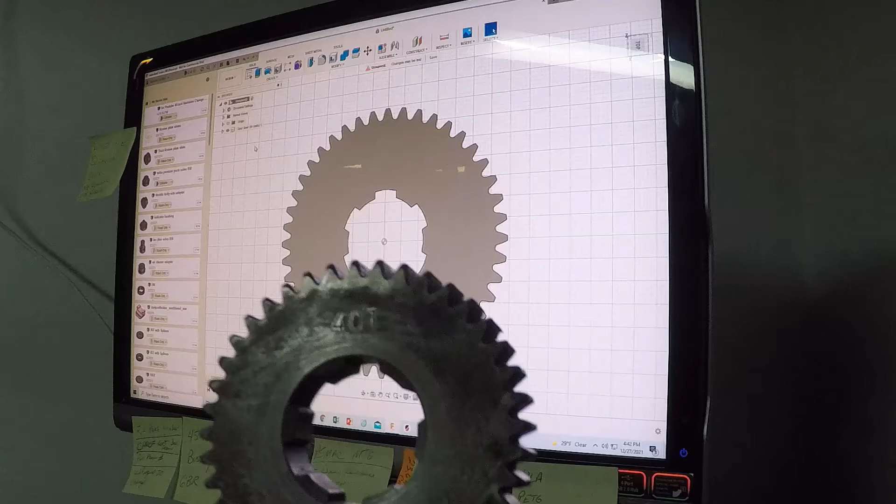I did not get a full set of them. Here, in fact, is an original factory one, and this one is a 40 tooth. You'll notice it has a quite unique feature - not a single keyway, but a spanned 6 spaces around it. This is a module 1.5 gear, and it is made of unobtainium.

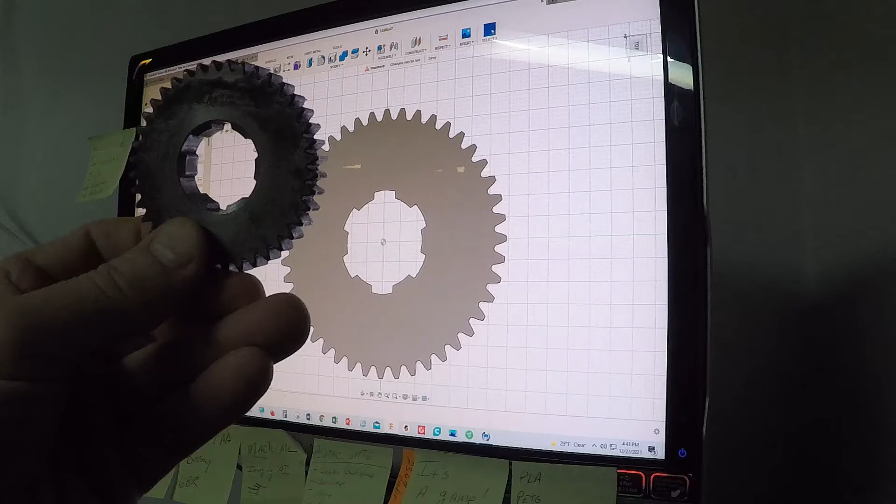You can get them, you can have them printed, but I've invested a lot of time, a lot of, well, depends who's asking, a lot of money getting to where I can 3D print my own if I need them, only for my personal consumption.

And from that one I was going to show you just kind of how I did it. Here's one on screen so you can see it. Obviously you can rotate it around and look at the tooth pattern. If you look at that, very, very uniform. The 3D printer will do a really good job of recreating this.

One issue - it essentially has to compensate a little bit for shrinkage. Now if you look inside the splines, there are different surface areas in here. I haven't saved this, but you can kind of see how this is distributed. But if you look really closely at the splines...

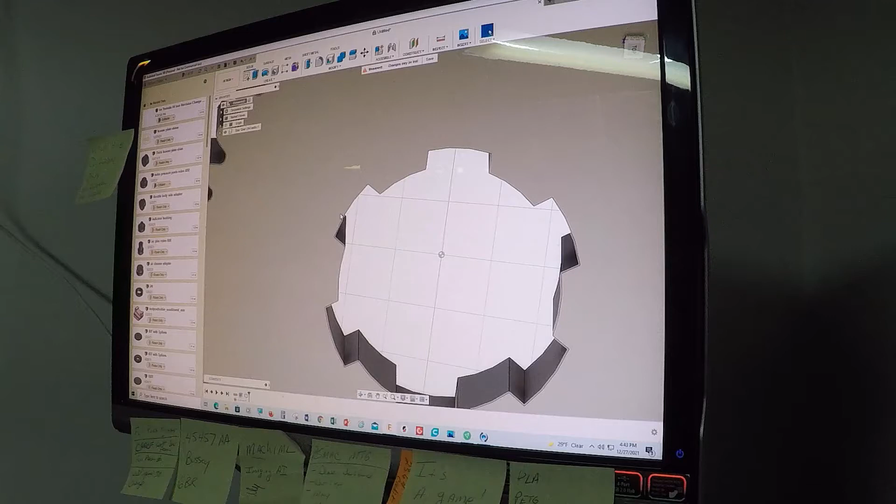It is square here, but it's square and it is riding on an outer race. And then so that leaves these right here with that pointed space.

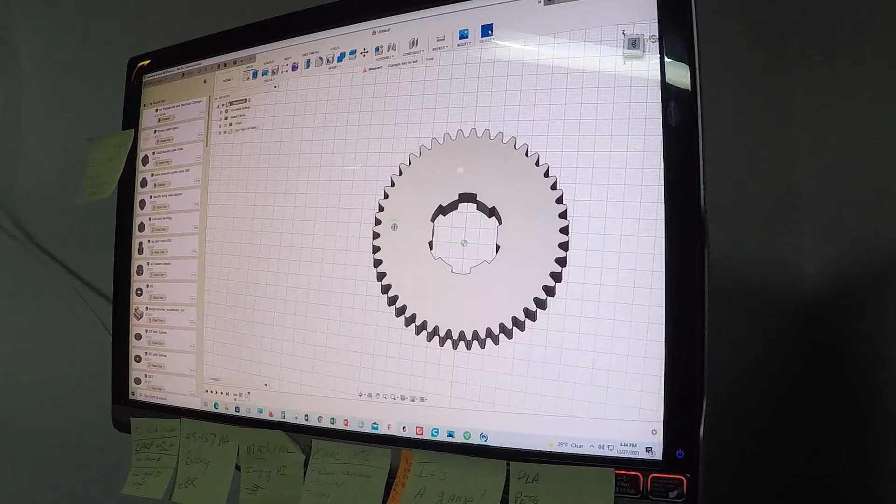Now I've made several of them. I wasn't going to show you just what I had done on one of them, but I thought, well, it took me a long time to get it. There were a lot of YouTube videos, a lot of this, a lot of that using Fusion 360. I thought I'd just show you because once it's all done, it's not too bad at all.

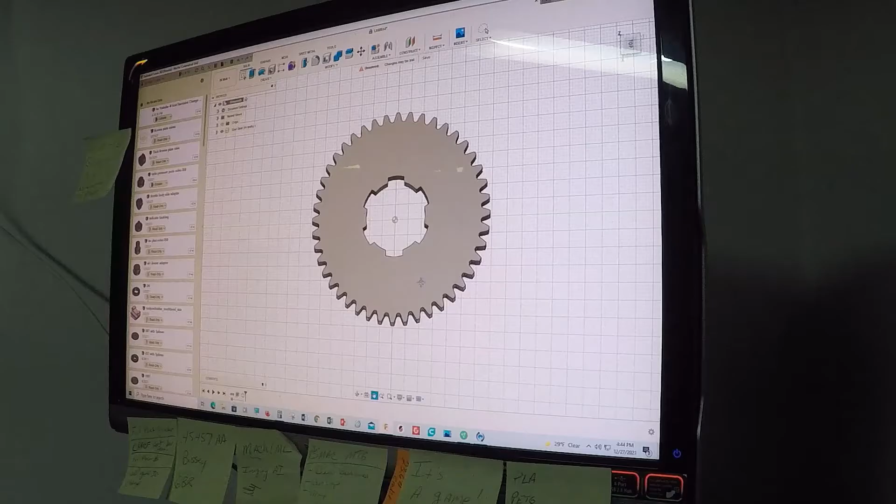Okay, brand new design, just came up here under file, new design. All right, before you go too far, go ahead and click save, give it a name. Now, this uses cloud storage on this free version, so I'll just share that with you.

Let's call this one - let's go cloud, 44 tooth Harrison gear for YouTube. Okay. Storage, I've already got a folder set up. I've already done it once just to go through the motions again, remind myself, but I'm going to save it again into the same area. Click save. Okay, so now up here you can see that there is a cloud 44 tooth Harrison, etc. So we've got a blank page.

And you can move this around. However, I'm not going to try to make you an expert in Fusion 360 because I am far from anything close, barely. Other than barely being functional, I'll go from there.

Okay, so the first thing is there is a very neat trick inside Fusion 360. If you look under the tools, you're going to see something called add-ins. This is what took so long to find. If you're trying to draw spur gears on screen, God love you, have fun, but there's a much easier way. All right, so tools, add-ins. Under that, there's scripts and add-ins. Somebody's already done a lot of work on our behalf, so let's go into here.

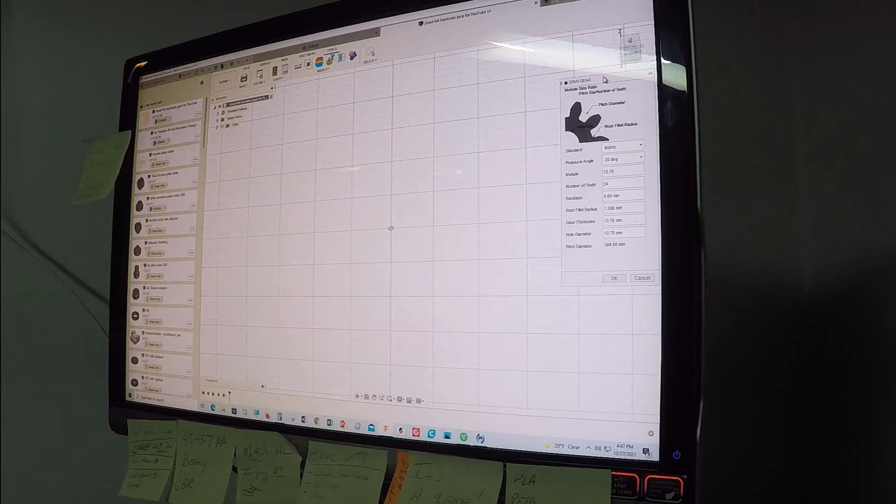And I'll put all the stuff on the screen. Hopefully you can see that right over here. I'm going to bring it over so you can see it. Now here's where the magic is.

We're making a metric gear. We could make an English gear, no problem. Pressure angle, we're going to leave it at 20 degrees. The module, we're going to go 1.5. Okay, the number of teeth, I believe we decided on 44 because it's a nice size. Don't worry about the backlash.

We're going to come back to this in a second. Gear thickness - 10 millimeters is right about where the factory gear is. So I wouldn't go much more than that. You're not going to gain a ton more strength in it.

Again, these are going to be expendable gears. You can run them, they'll be fine. Again, they're only moving the carriage. They're not doing anything dramatic as far as carrying the load of the spindle. So from that one, let's go 10 millimeters.

And then the hole diameter, I'll put these in the documents here. The hole diameter is going to be 22.97.

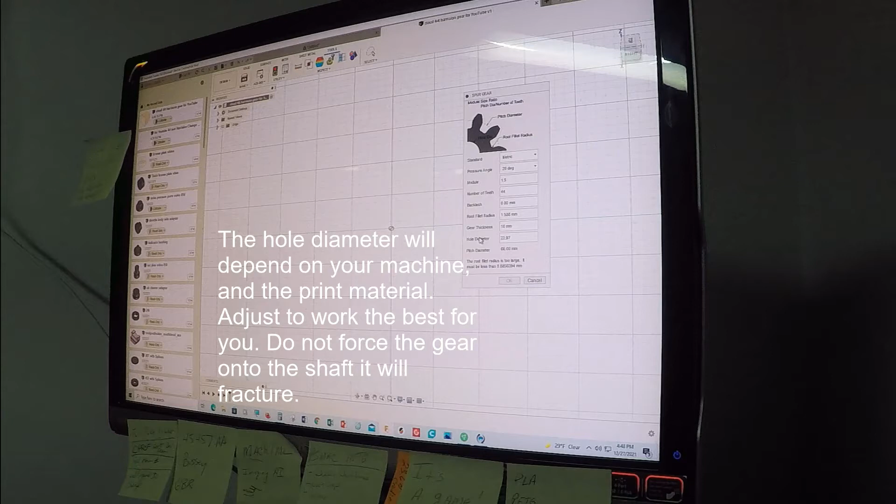The measured is 22.95, but shrinkage, when you print this stuff, it's going to draw up a little bit. Again, these are going to be really, really close, so don't worry about it. But what I'll mention now is right down here, there's an error message that says the root fillet radius is too large. It must be less than 0.885. All right, so this is the one that's causing you the issue.

Go 0.885. Okay, now pitch diameter, that's handled by the tool itself. 20 degrees, 1.5 module, 44 teeth. Not going to worry about the backlash. We're going in plastic, and the gears, when you bring them up on the banjo, it's going to be adjustable, so the backlash is something you can control. Root radius, we just adjusted that one. Gear thickness is 10 millimeters.

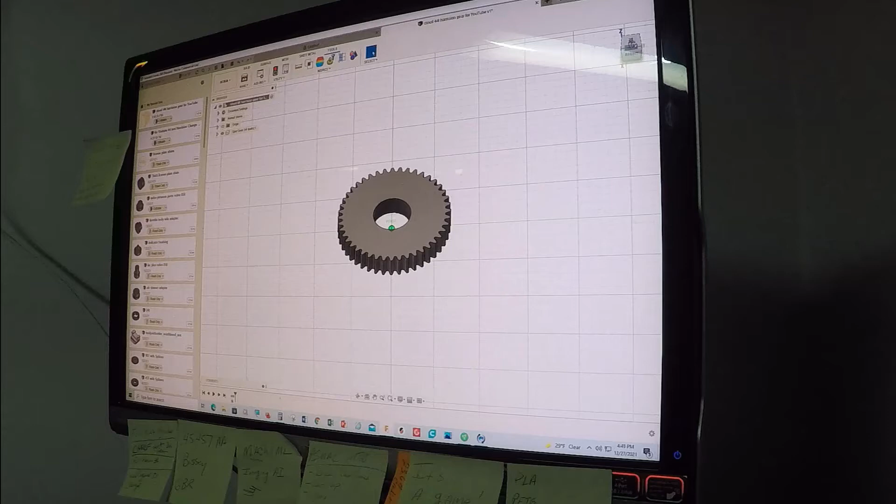Hole diameter, I bumped it up by 0.02 millimeters because of the shrinkage. I just want a nicer fit on the spline. Normally I go 22.95, and then we go. All right? Boom. Give it a second to get its breath. Boom. There's your gear. Wow. Boy, that was pretty easy. Absolutely. So there's a beautiful gear rendered for you and ready to go. The big problem now is, okay, Dan, how the heck did you do that spline?

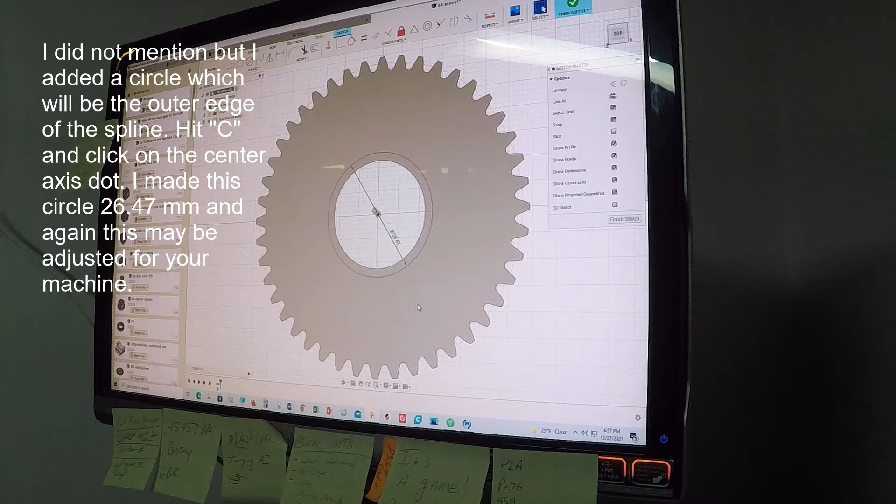Okay, so we've generated the spur gear. I'm going to clip out the previous version I was doing there. It kind of got screwy. It was carrying in attributes from our previous one, and it was causing me heartache. So, right from here, I'm going to do an L, which is going to draw a line. Don't worry about the dimensions yet. I'm going to come up and kiss this line right here, and go right across to this one. And I'm going to connect right back to the center.

Now there's easier ways to do this. There's 1,500 different ways of doing this in here. So I'm going to come right here, hit escape to get rid of that. Ooh, see, that's how it did that? All right, we'll fix it now. Hit D for dimension, and we want half of 6.45. So I'm going to go 6.47 because of that shrinkage issue, divided by 2, and 3.235. Boom. I'm going to do the same thing on the opposite side. 3.235. Boom. Hit escape, just break out that tool, and there you go.

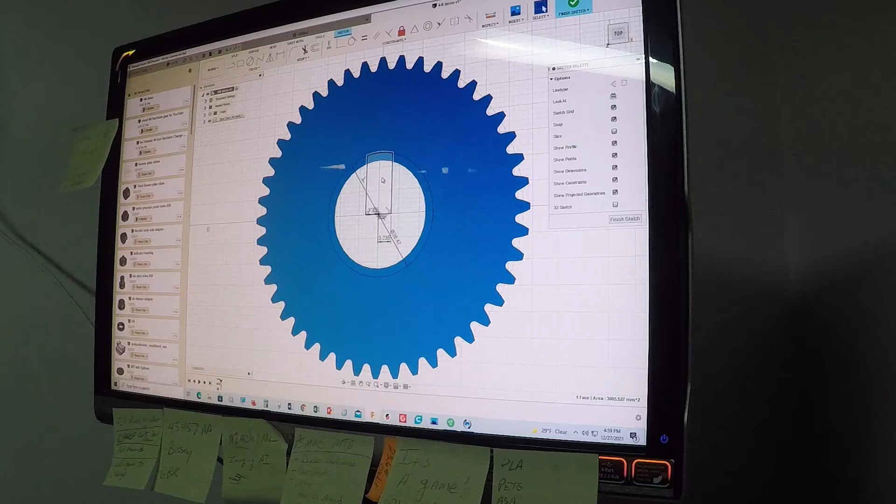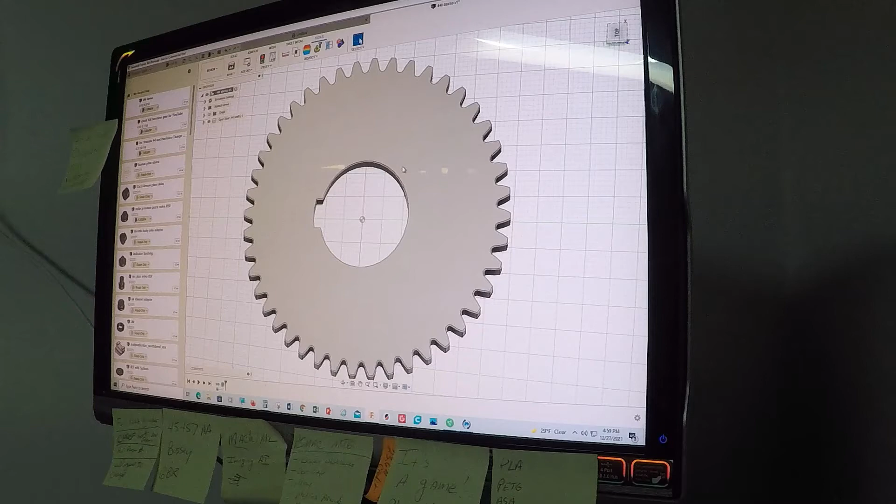Now, when you highlight it like this, because I'm dead on center, that's already going to be centered, and I've done this in 2 pieces. So what I'm going to do now is right click and hit press pull, and I'm going to go 10 millimeters. We know that's how thick it is. And boom. We have just made a spline. Only problem is we need 6 of those. Well, not a problem.

Let's go up to the top, go to the solid menu and create. I'm going to come down to pattern, circular pattern, because that's what we want. Now, here's where it gets a little tricky. I need to click this surface, and rotate around here and click this one right there. Okay, so those are 6. My axis, I'm going to go on that same axis. Now look, it pulled up. How many do you want, Dan? Well, let's go with 6.

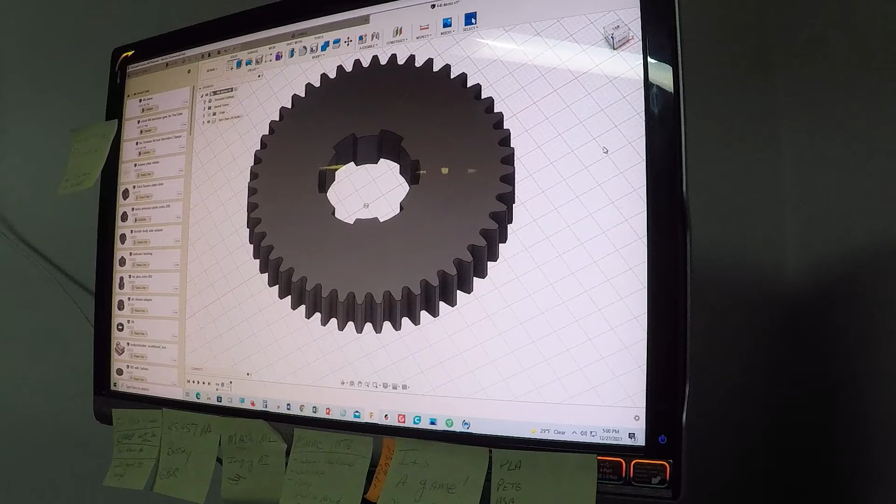Got 6 on the same center, using the same dimension that we sketched out with the lines. So each one should be 6.47, and then we're going to click OK. Boom. There you go. You've just basically made a Harrison 44-tooth gear using Fusion 360 with basically the correct spline, give or take. You may have to fiddle with them a little bit depending on the size of your gear shaft. You may have some wear, you may have some burrs, but this will fit pretty darn well. I've done several of them.

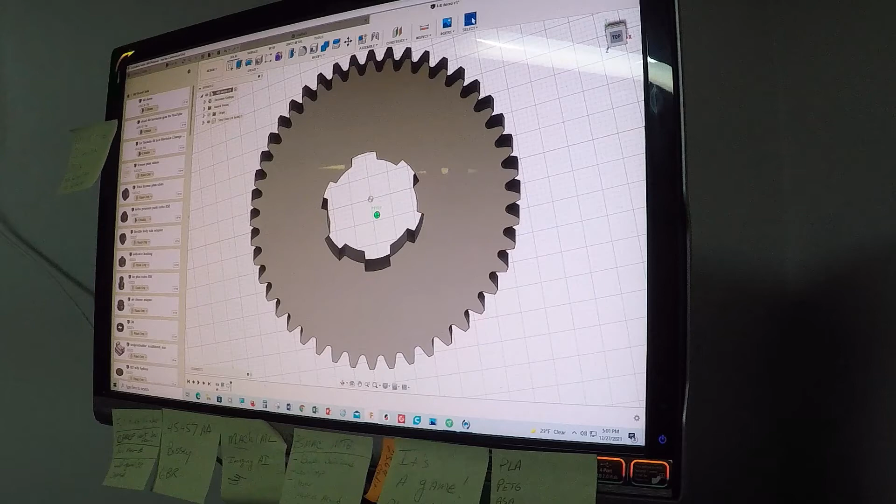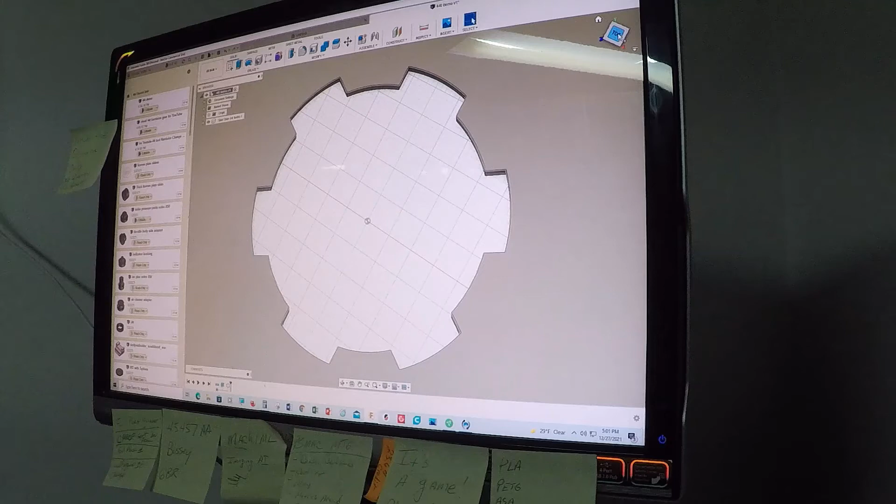Now what I wanted to point out is, why is this thing such a problem? Well, look right here. This angle right here will drive you nuts. How do you cut that? Well, this takes out the shaper, it takes out the milling machine. You've got 6, they're uniform, 6.47. You may have a cutter to do that with, I don't know. But I could print these in 3D in a couple of hours versus making a metal one. And again, these are change gears. I don't need a lot of strength. I just need to be able to print one out, and mostly it's giving me the ability to cut metric threads and a few things like that.

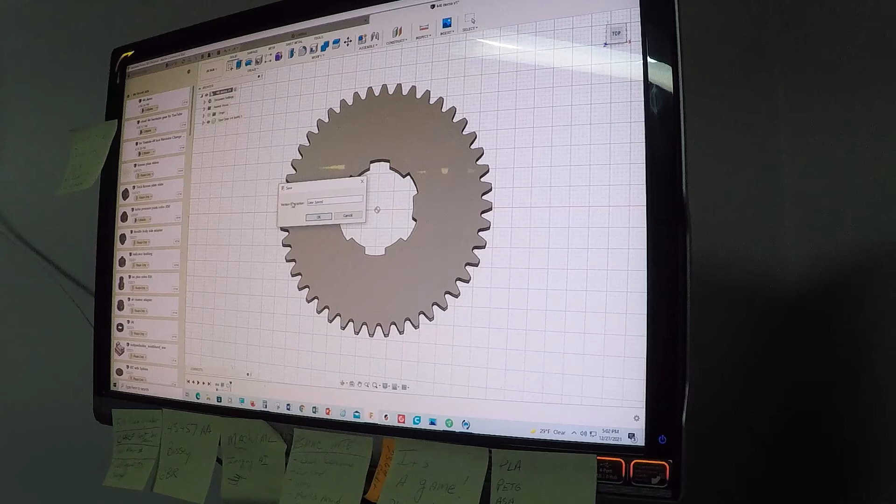Now I have gears all the way up to 100. I even did a 127 one just for giggles. All done the same way. So Fusion 360 generates the spur gear for me, and from there all I got to do is sketch in these splines, and now this is ready to be created in 3D. So what I'll do from here is we'll save it, go user saved, and from here we are going to export.

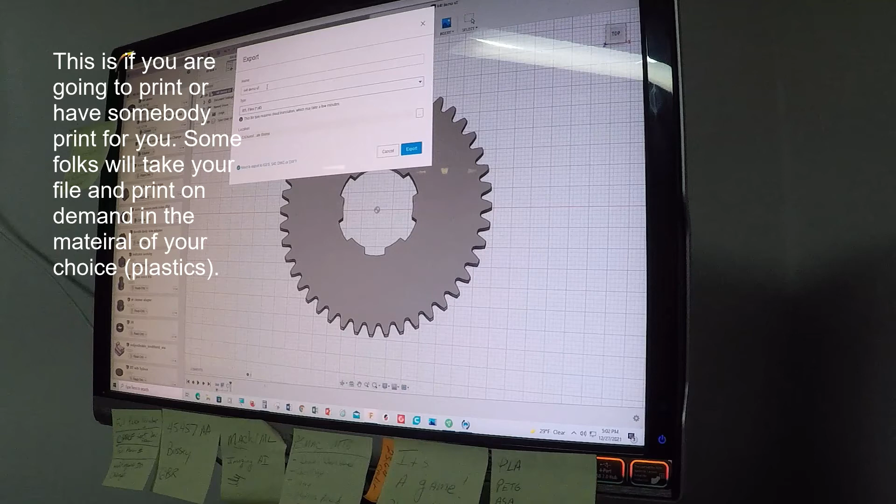Alright, and I'm going to export an STL file right from here, 44-tooth demo. And then I'm going to export it. In my situation, I've got a folder set up in 3D Objects, and you see I've generated quite a few things. And I'm going to make a new folder. 44-tooth Harrison. Okay.

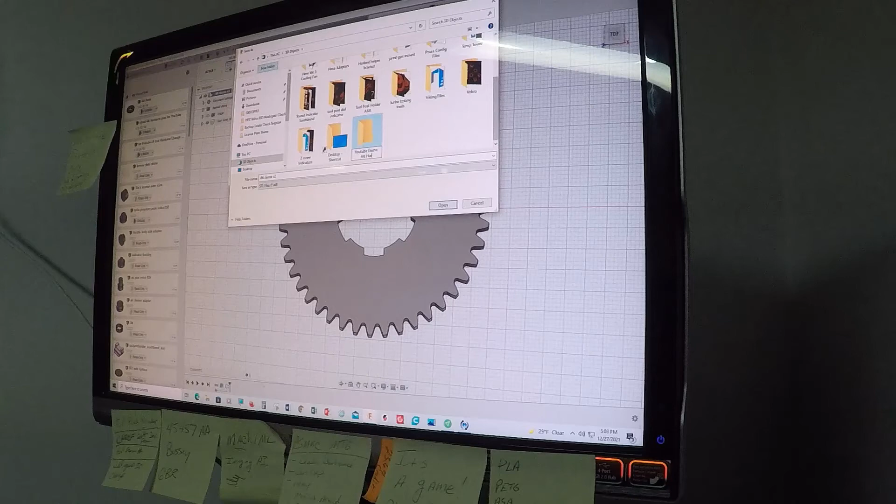Yep, typing class. True story, I was thrown out, believe it or not.

Yep. And then I'm going to export it. What this is going to do is bring us an STL file that we're going to put into a 3D slicer. And from the 3D slicer, it's going to slice it into G-code, which is going to allow us to export it and do it on the 3D printer. This will take just a couple of seconds here.

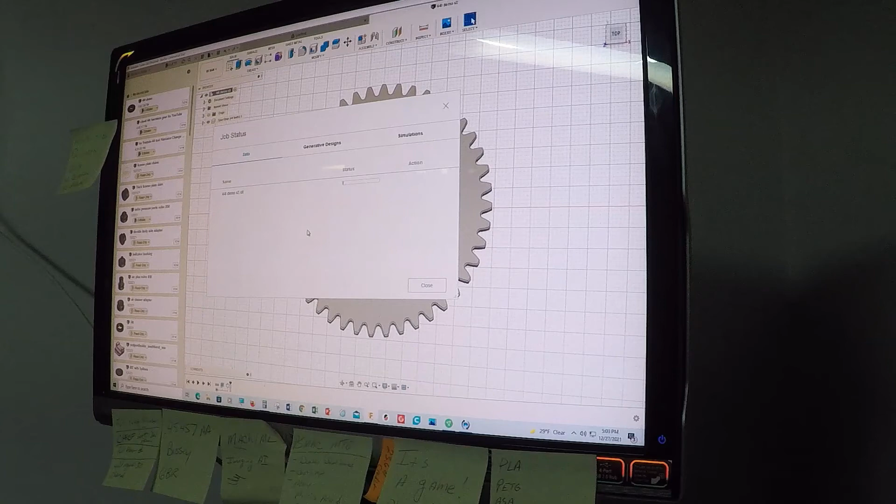But long story short, you can get Fusion 360 personal, not for commercial use. You can get it for free. There's a little bit of a process to do it. Learning it, you really... What you saw me do didn't require any real skills. It was finding out the tricks.

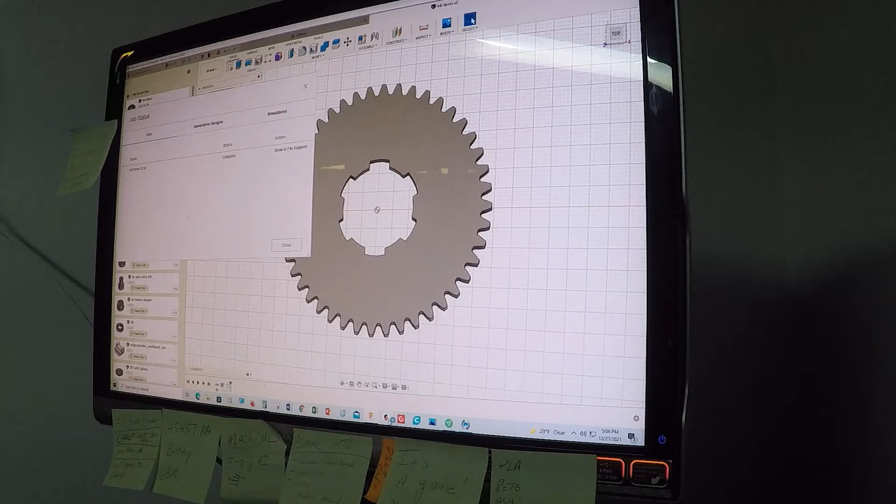Okay, so the 44-tooth demo is all done. Now I'm going to use Prusa Slicer right down here at the bottom. Okay, and I'm going to do this on my Prusa Mini. I have an Ender 5 Plus, the gigantic one. But from this, I'm just going to go ahead and come in and import.

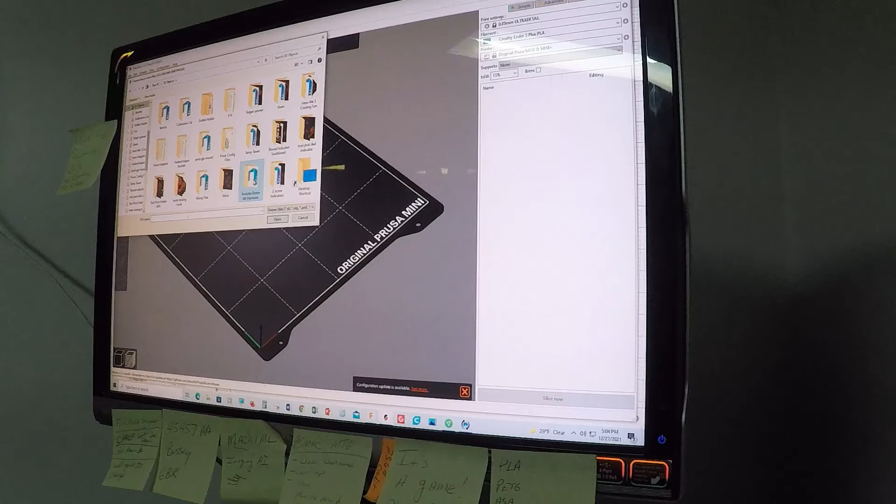All right. And I'm going to go to 3D Objects, and we have that. Let's see here, the gear. Where did I park that one? YouTube demo. Here we go. There's the STL file, and we're going to open it in the slicer. Okay. There's a gear we drew. Rendered in physical form.

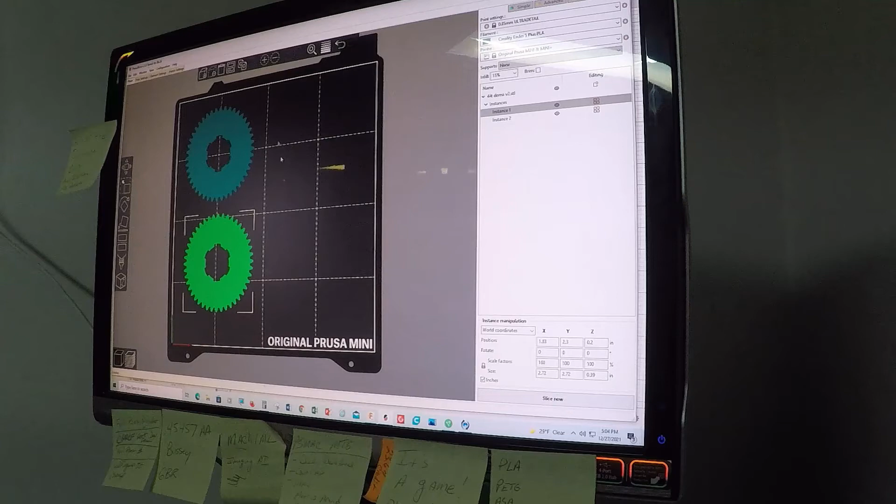Hey, that's pretty cool. So if I want from here, I can actually generate 2 of them at the same time. Now, it's going to add to the printing time, obviously, but what's nice is you can actually do it. Right from here, it doesn't really matter where it is. And you can see it from the upside and the downside.

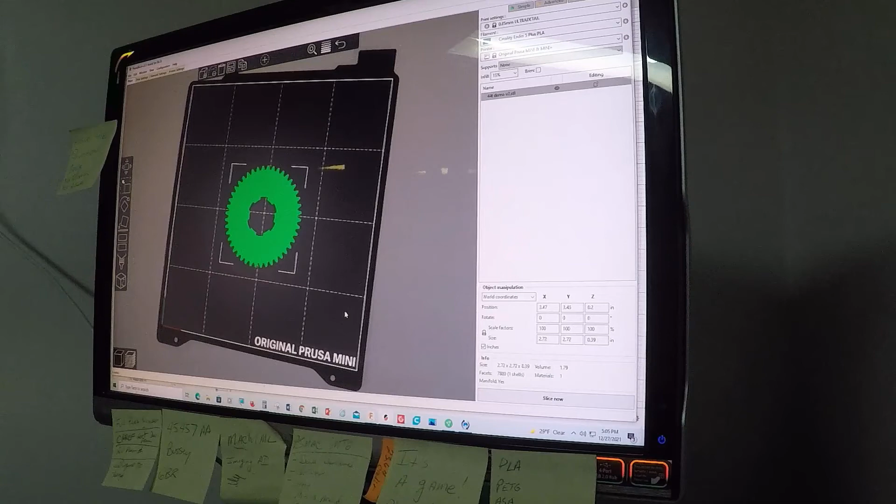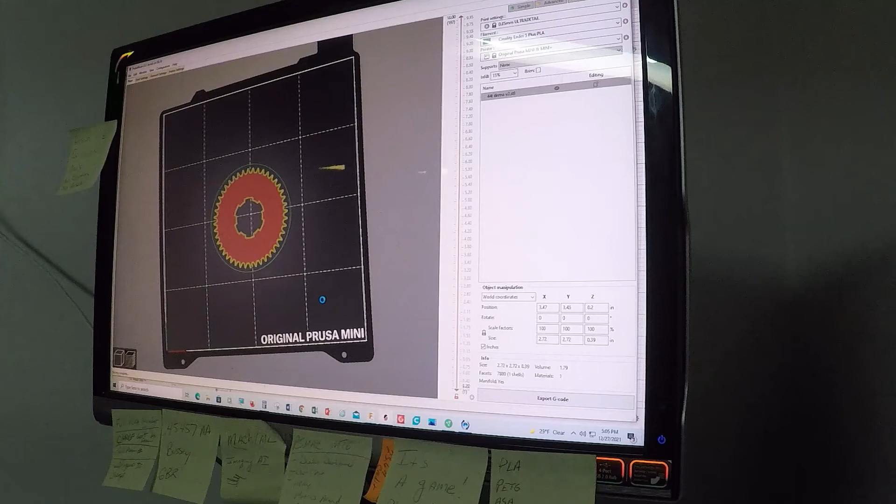Now from here, you just click slice. All my settings are already set up. I've got it set to the Prusa Mini, and just going to use PLA as the example for this one. Okay, it's almost done. And what I will do is I'll beef this one up. I've got it set to some fairly minimal things here. You see right here this perimeter, kind of this yellow, it's only showing 3.

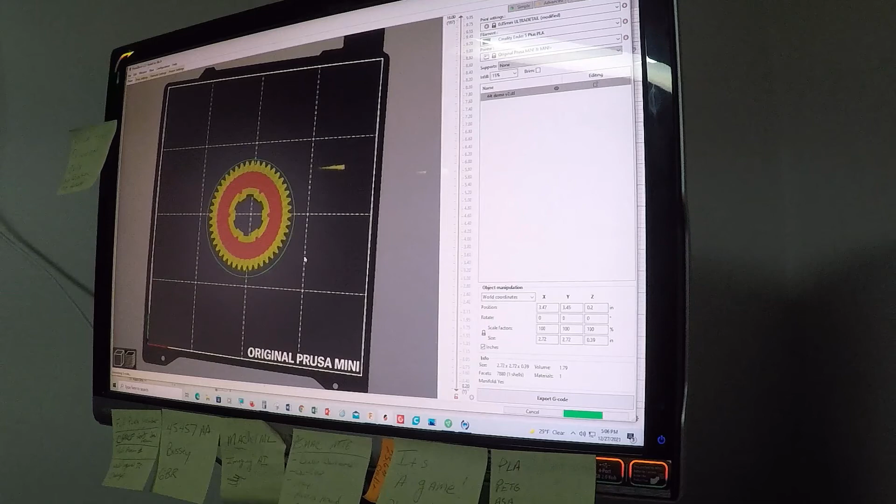I've got to go to the print settings and layers and perimeters, vertical shell. I'm going to set that to 10. Okay. And don't worry, it disappeared, but it's going to be okay. What that means is now, look at this gear. Now there are 10 shells around it. So 10 hard layers all the way around the splines, as well as the outer teeth. That's going to be as strong as it's going to get. This thing is not going to be indestructible, but it's going to be fairly solid.

Now, there's some cool things you can do in here. You can actually decompose it. See those squiggly lines? That's the infill. I think it's using a gyroid in this one, and you can change those settings there. It's at its base level, and then as it comes up, it's going to draw in those for the infill. I've got the infill only set at 15% right now. I will bump that up to, well, let's go 40%, and I'm going to slice it again.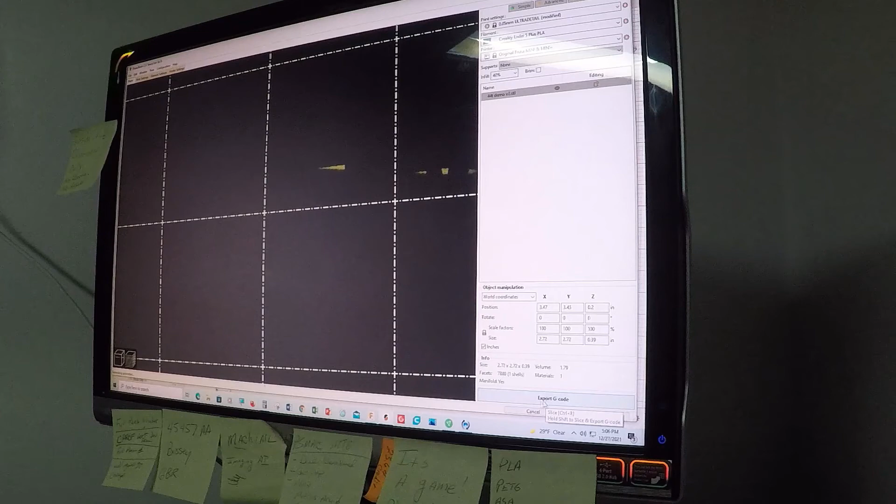Hopefully this is of some use to you. It's very difficult to get started, but once somebody gives you a hint or 3 or 5 or 12, it's not bad at all. Okay, and it's going to tell me how long it's going to take. So I've got 40% infill. I've got 10 outer layers. That really doesn't change the print time a ton, but it does make this thing a lot stronger than what it would have been.

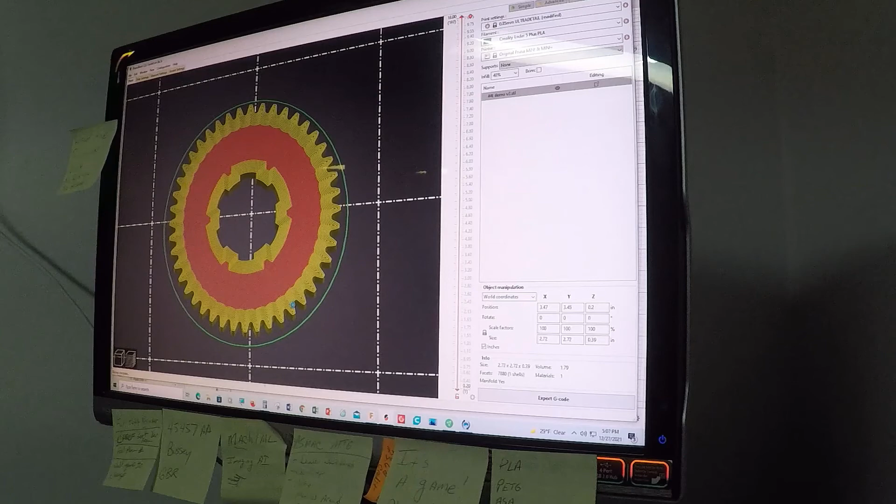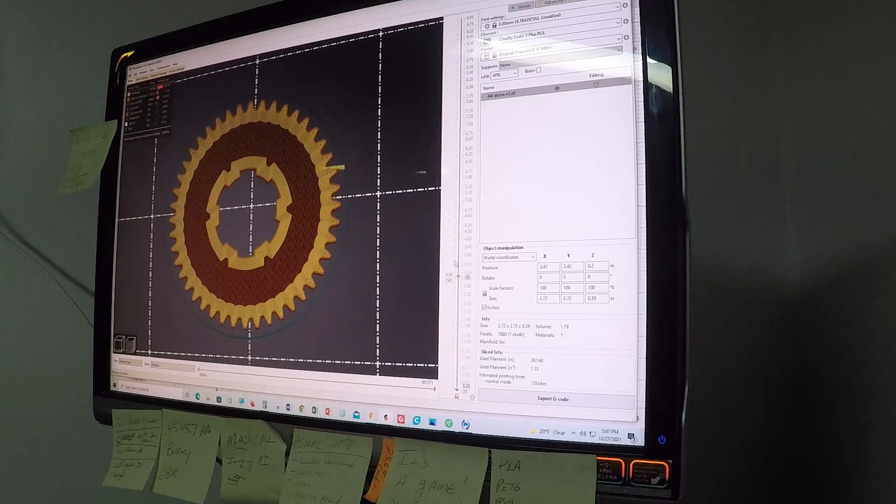Okay, that gear, the way it's set up, will take 12 hours and 54 minutes. Just to give you an idea. Long printing time, that's fine, but with 40% infill and 10 rings around the outer edge, it's going to be very strong for what it can be. Now the material is PLA, it's not super strong in itself. You can do this in nylon. You need a little bit better printer for that.